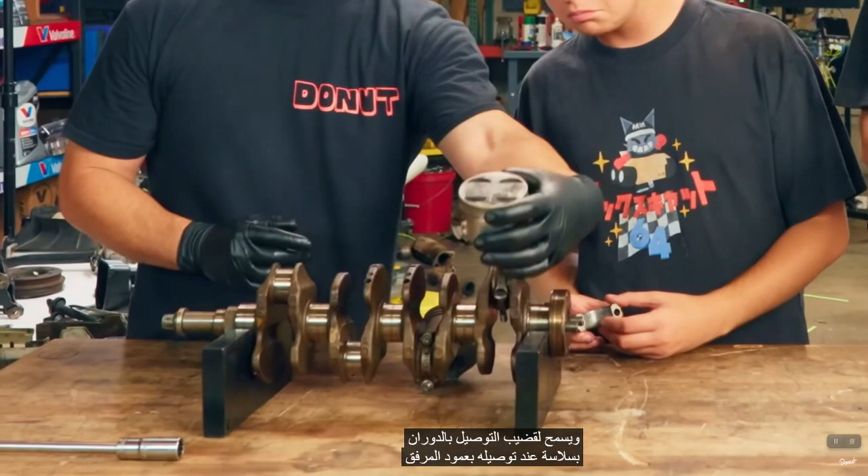The piston is attached to the connecting rod via a wrist pin. On the bottom of the connecting rod is a crankshaft bearing, which minimizes wear and allows the connecting rod to rotate smoothly when attached to the crankshaft. A rod cap holds the other end of the connecting rod onto the crankshaft, completing the connection.

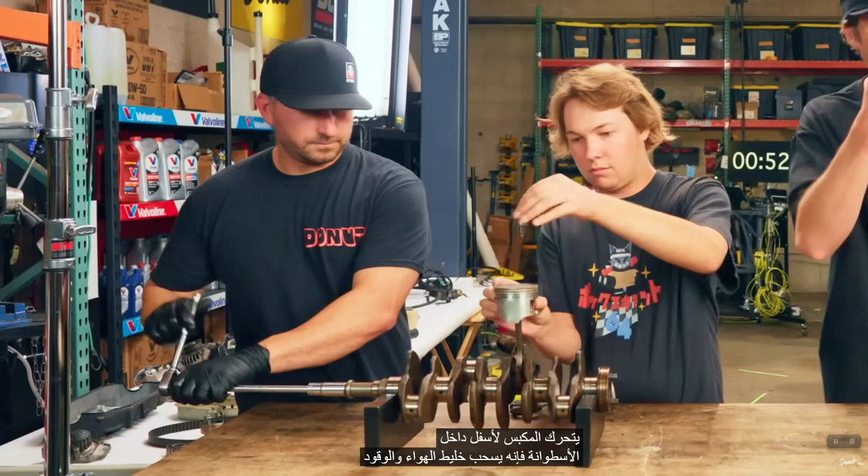As the piston moves down the inside of a cylinder, it draws in an air-fuel mixture. The piston compresses that mixture, which is then ignited by a spark plug. The resulting combustion pushes the piston back down, and then as it returns to the top, it pushes out exhaust gases, and the cycle continues: sucking in air and fuel, compressing it, igniting it, and then pushing out the exhaust.

That process is what gets the crankshaft spinning, which spins the transmission, which spins the drive shaft, which spins your wheels. Okay, so that's the basics out of the way.

But to cover each and every part that goes into this engine, we're going to have to break it down into 6 systems. The rotating assembly, that's the central mechanical system at work. Timing: a lot is going on inside an engine, and those moving pieces need to work in unison. Cooling: engines want to get hot, so you need a system to keep them from overheating. Airflow: if you want to burn fuel, you need oxygen in the equation. Electrical: whether it's a modern car or a 50-year-old beater, a functioning engine needs a functioning electrical system. And finally, and maybe most obviously, fueling.

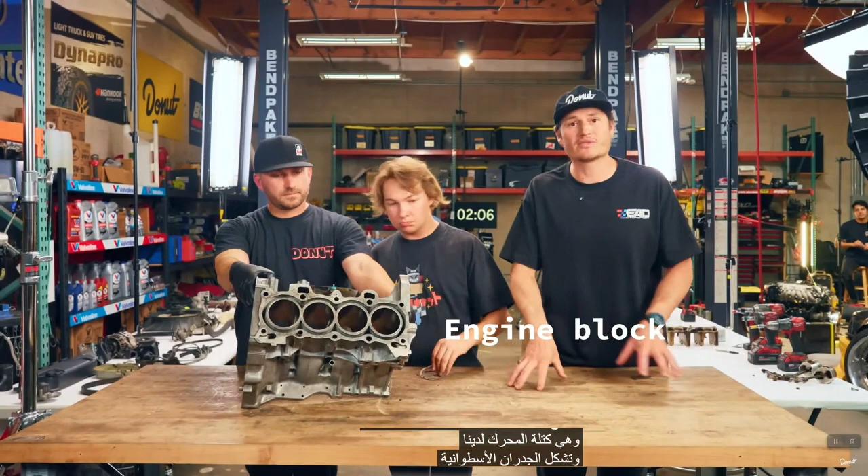In order for compression and combustion to take place, we need a strong, sealed combustion chamber. That is our engine block, and it forms the cylindrical walls of the chamber, while piston rings mounted on the outside of the piston ensure a tight seal.

In our case, the top 2 rings are called compression rings, and they form a seal between the piston and the cylinder wall, while the 3rd ring, called an oil control ring, distributes a thin layer of oil on the cylinder so the piston can move smoothly up and down.

Inside the block are various coolant and oil passages called galleries to help keep the engine cool and lubricated. Looking at the engine block upside down, you can see the semicircular cutouts that will house the crankshaft, which are fitted with crankshaft bearings and 2 thrust bearings that prevent the crankshaft from sliding back and forth.

Okay, good job, boys. That's pretty cool. All right, now let's pick up the pace a little bit.

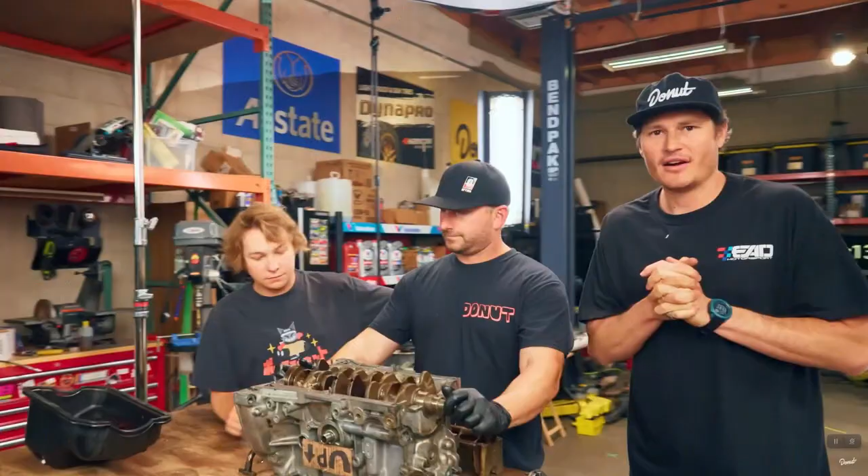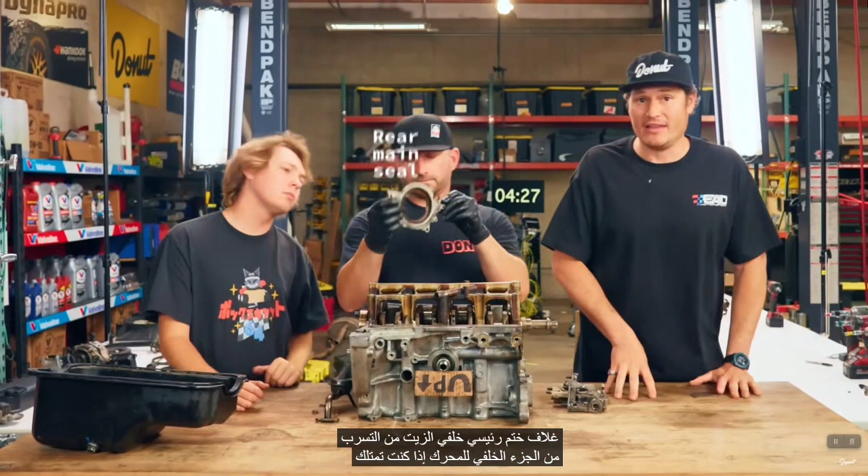Holding the crankshaft is a crankshaft support bracket, which uses little press-in dowels to stay perfectly aligned. A rear main seal inside the rear main seal housing keeps oil from leaking out of the back of the engine. If you own a car from the 90s, this is leaking right now in your driveway. Go check it out, I'll wait.

See, I told you. Now, the front main seal is actually situated in the oil pump, and the oil pump is directly powered by the crankshaft. As it spins, the oil is forced through the galleries, constantly lubricating all of the engine's components. It is also sent through the oil filter, which catches any contaminants in the oil before getting to those important components. Now, feeding the oil pump is the oil pickup tube, which draws oil from the oil pan, which is kept sealed with the oil pan gasket.

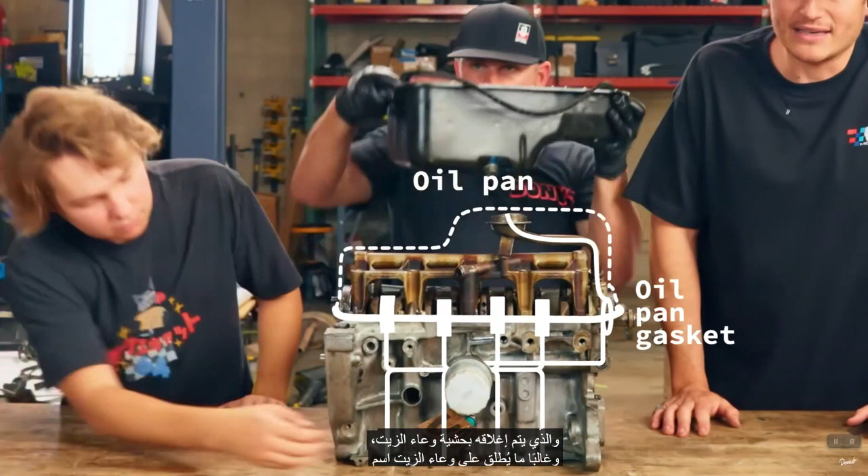Now, the oil pan is oftentimes called the oil sump, and it's where you'll find the oil drain plug, which lets you drain oil before you do a change. This thing right here, drive-through oil shops hate these things.

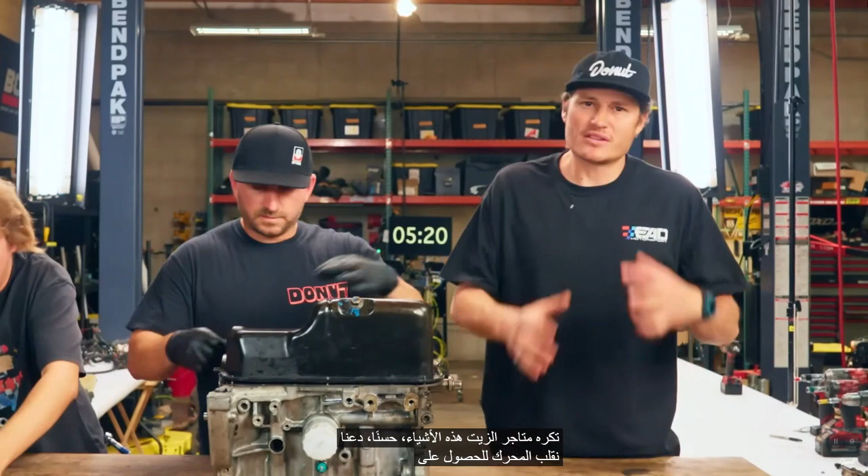Okay, let's flip the engine over to get ourselves a proper perspective, because the engine is translating the up and down motion of the pistons into a rotational motion. That rotational motion of the engine, it can get a little jerky.

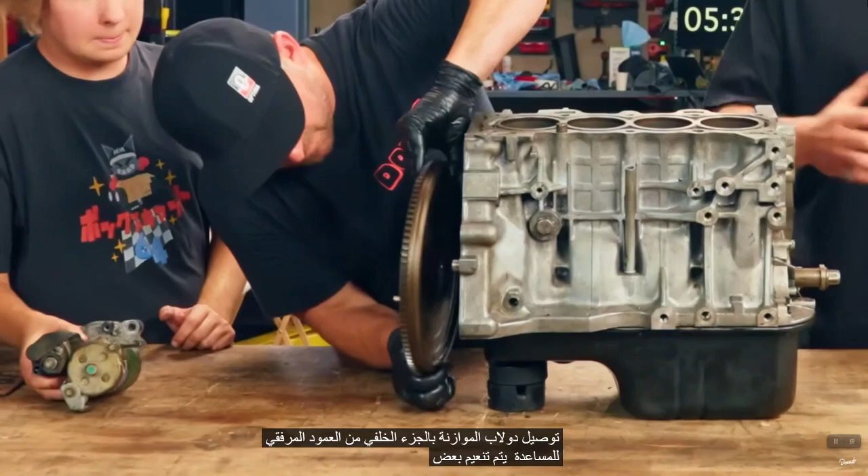So a flywheel is attached to the back of the crankshaft to help smooth out some of the engine's rotational motion. The flywheel is cast with teeth along the outside of it, and those hook up with the starter motor, that's just a small electric motor that gets the engine spinning before combustion can take over.

All right, so that covers most of the rotating assembly, but a lot of the action in the engine occurs at the top of the combustion chamber in the engine's head. Now, this mounts on top of the engine block with the head gasket ensuring you got a tight seal.

Not only does the head seal off the top of the combustion chamber, it also houses all of the intricate pieces that control airflow. Yeah, a lot of pieces. That includes things like the intake and exhaust valves, which let fresh air into the combustion chamber and lets waste gases out.

The valves are held closed by valve springs, which are held in place with valve spring retainers. The valves are pushed open using the camshaft. In our engine, we just have a single camshaft controlling both intake and exhaust, but other engines could have up to 4 camshafts. The camshaft is made up of offset lobes. So as the camshaft spins, which is inside the camshaft bearings, those lobes push on rocker arms, which pivot on a rocker arm shaft and push on the valve.

The valve runs through a valve stem seal to keep oil lubricating this whole assembly and keep it out of the combustion chamber. So as we spin the camshaft, you can see how the lobes push against the valve assembly and the valves open and close. Now, when assembled, the entire valve assembly looks like this.

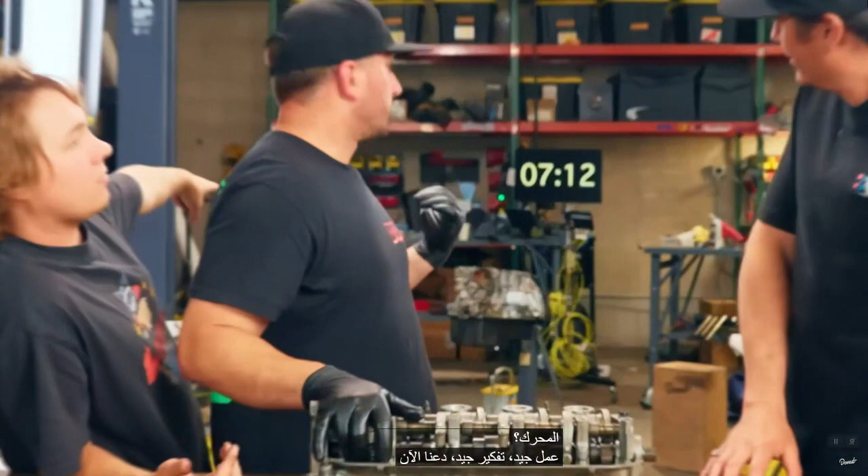Okay, cool. Now let's put the head on the engine. But where did the engine go? Oh, good job, good thinking. Now let's get that head on.

Okay, so we want to make sure that air is going into the engine at the right time and exhaust is leaving the engine at the right time. You wouldn't want a valve opening in the middle of a combustion stroke. So in order to synchronize the timing of the valves to match the timing of the pistons, we can just synchronize the rotation of the camshaft with the rotation of the crankshaft.

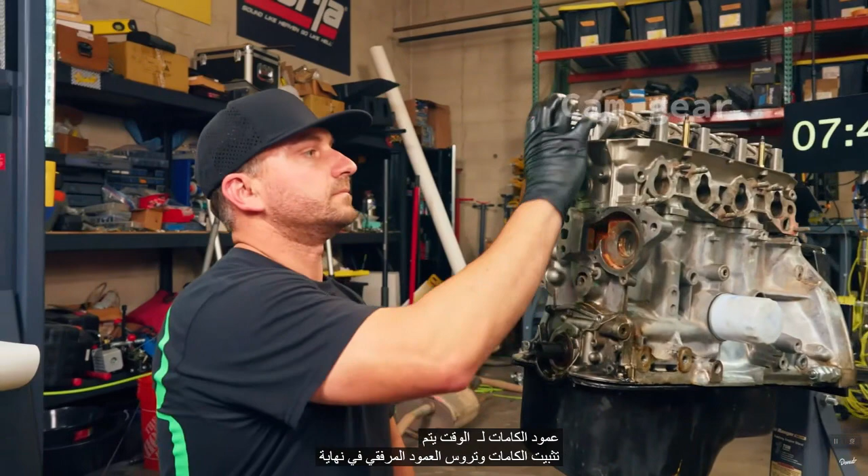So to do that, we need a few gears and a timing belt. A cam gear is mounted to the end of the camshaft to time the cams, and a crankshaft gear is mounted to the end of the crankshaft to drive the camshaft. But the timing belt doesn't just turn the cam gear, it also powers the water pump, which is responsible for sending coolant throughout the engine block to prevent it from overheating.

We're going to come back to cooling in just a minute, but first we need to keep tension in the timing belt using a timing belt tensioner. And the way we link our cam gear, our crankshaft gear, and our water pump gear together so that everything is in time is by using a timing belt.

Now to prevent any dust or other debris getting into those gears, we need a timing belt cover. And then on top, our precious valve assembly is protected by a valve cover.

Now that the valves controlling our air intake and exhaust are in time and the motion of the pistons is in time, we need to ensure that the combustions happen in time as well. So like we mentioned earlier, each combustion is set off by a spark plug.

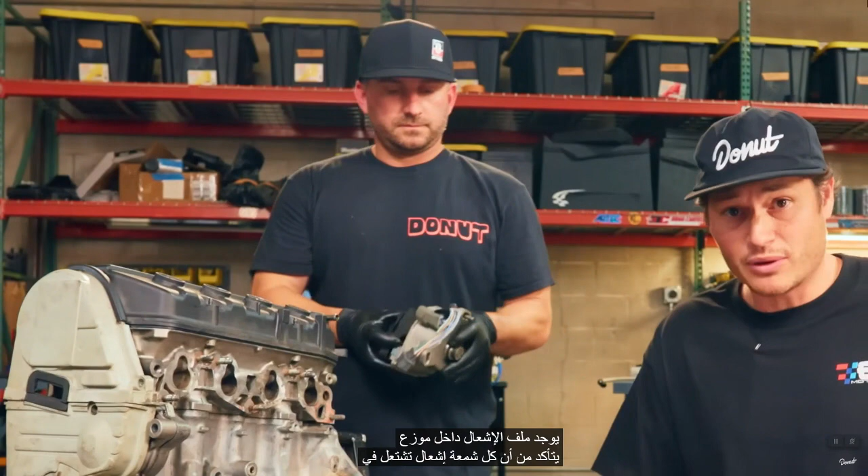Now unfortunately, the 12 volts from a car battery isn't sufficient for a spark plug to create an arc. So an ignition coil uses induction to increase the voltage from 12 volts to something like 40,000 volts. In our case, the ignition coil is found inside a distributor, which makes sure each spark plug fires at the correct time via the rotor.

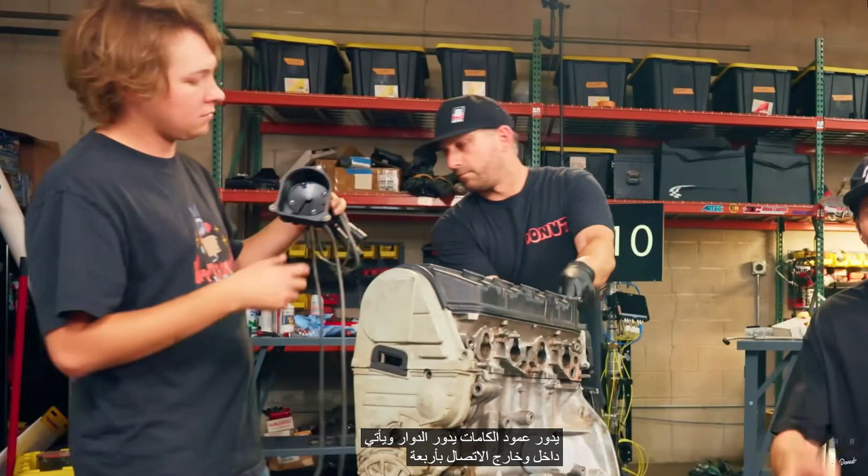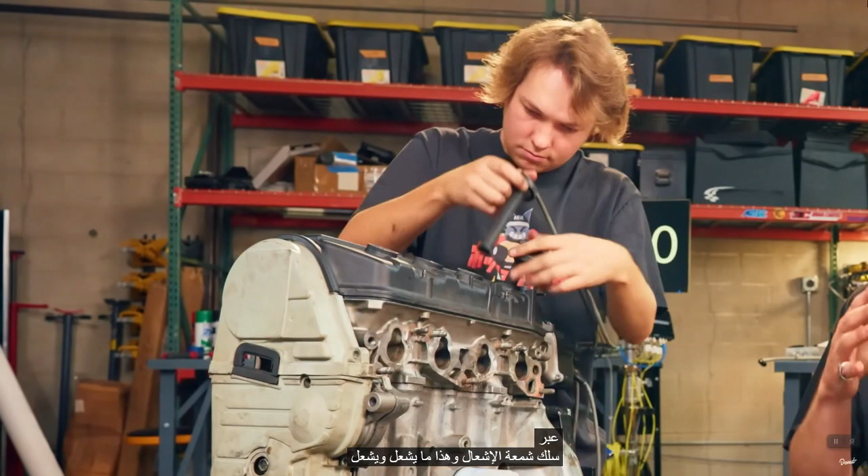The end of the rotor receives electrical current from the ignition coil. So as the camshaft spins, the rotor spins, and it comes in and out of contact with 4 terminals in the distributor cap. As it touches those terminals, an electric current is sent to a corresponding spark plug via a spark plug wire. And that is what sparks and ignites our air-fuel mixture to create combustion.

Now with all those sparks going off thousands of times a minute, we need to keep the battery charged with an alternator. The alternator is held in place by an alternator bracket and an alternator tensioner. Inside the alternator, that is where all the magic is happening.

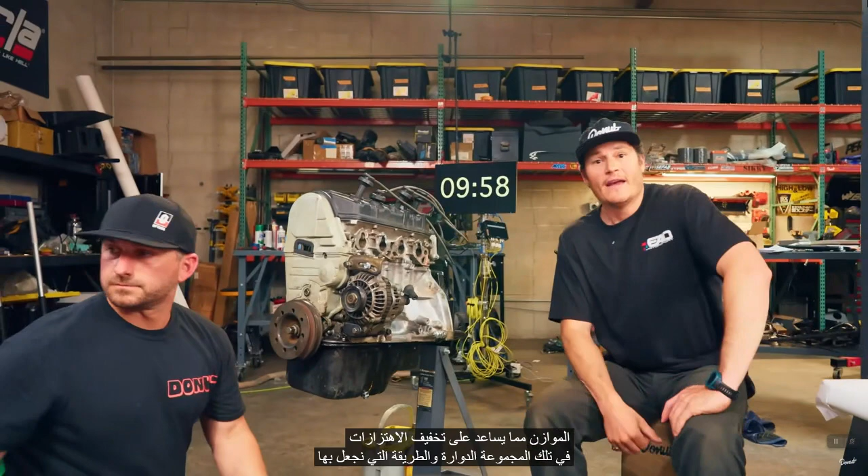An electric current is induced by spinning an electromagnet. That electromagnet is spun by the alternator pulley. Now driving that pulley is a harmonic balancer. Sometimes this would just be a crankshaft pulley, but our pulley is integrated into the balancer, which helps dampen vibrations in that rotating assembly. And the way we get the alternator pulley spinning is by means of an alternator belt.

Now, with all those little explosions going off every second, engines can get hot, like really hot. And since the crankshaft is always spinning, the water pump will always be spinning as well. But sometimes, like in cold weather, you actually want the engine to warm up a bit. So this coolant pipe exiting the pump leads to a thermostat housing, which houses the thermostat.

So the thermostat is technically a valve that slowly opens and closes depending on the coolant's temperature. When the coolant's cold, the thermostat closes and the coolant is redirected back to the engine to keep warming up. As the coolant heats up, the thermostat opens, directing the coolant out of coolant hoses, making its way to the front of the car where it enters the radiator.

Attached to the radiator is a cooling fan which helps dissipate the heat into the air before the coolant returns back to the engine.

Now throughout this process, as coolant heats up, it expands. So the radiator cap allows that expansion to happen at a set pressure. If the pressure gets too much, the spring in the cap compresses where coolant will flow over into the coolant reservoir.

Now, for an engine to run properly, the ratio of air to fuel in the combustion chamber is absolutely critical. So we need to control the airflow going into the engine's intake ports right here.

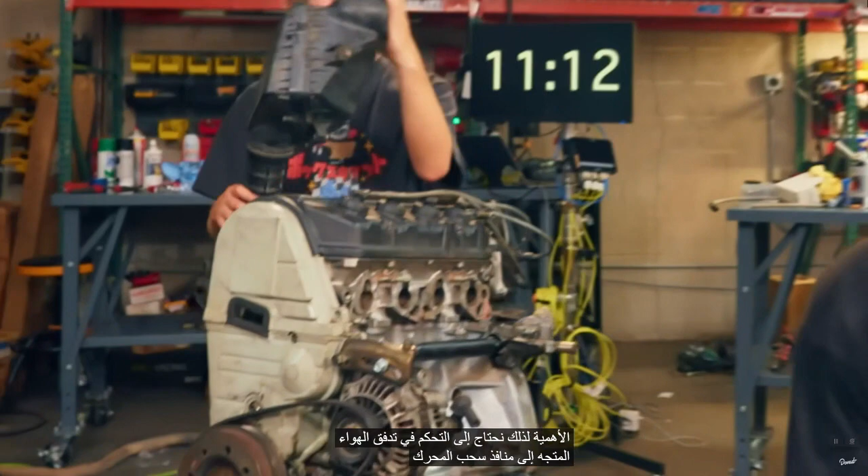Starting from outside the car, air goes through the air filter, which is in the air filter housing. This gets rid of any major contaminants before going through the air intake pipe and past the throttle body.

The throttle body houses a butterfly valve that is controlled by the gas pedal, and it determines how much air gets into the engine. The more air, the more fuel, the faster you can go.

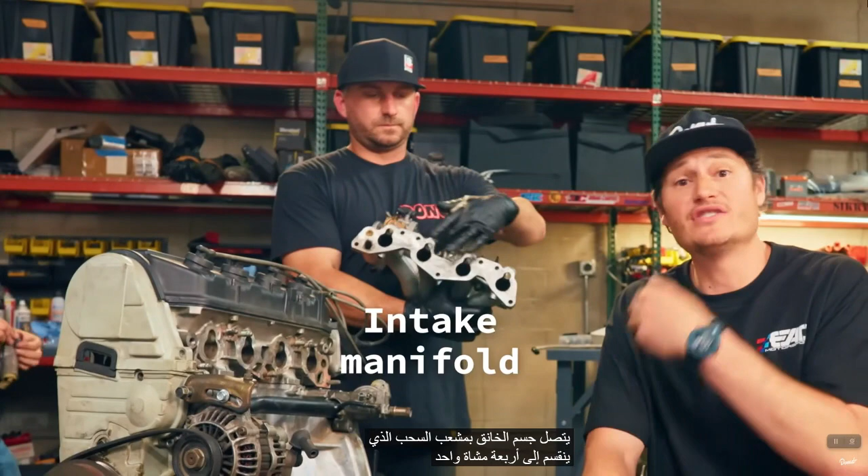The throttle body connects to the intake manifold, which splits apart into 4 runners, 1 for each cylinder in the engine. Next to the throttle body is the idle air control valve.

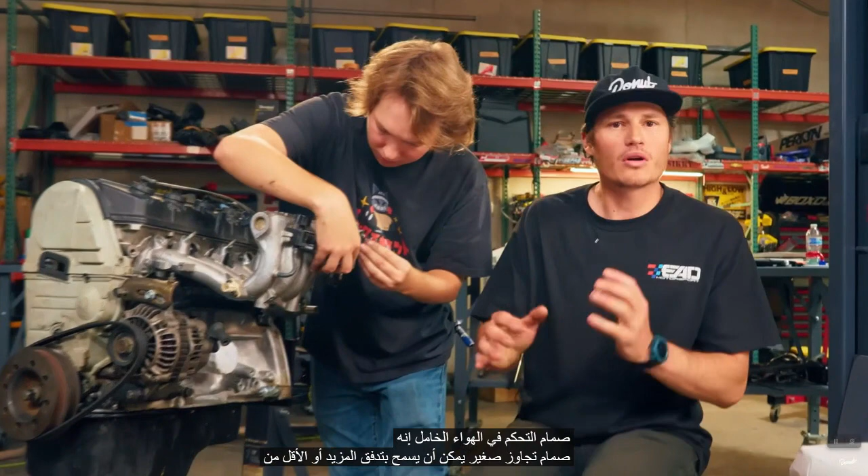It's a little bypass valve that can allow more or less air to flow into the intake manifold to compensate for different air temperatures and densities, and that helps maintain a smooth idle speed.

Now, after combustion, the exhaust gases from each cylinder converge into an exhaust manifold, and then they go through a front pipe into a catalytic converter, a thief's favorite part of a car, where a chemical reaction converts really bad emissions into only kind of bad emissions.

That exhaust gas flows through your exhaust pipe, reaching the muffler, which quiets everything down, and then finally out the tailpipe. Now, some of the combustion might actually get past the piston rings and into the crankcase below.

In that case, the gases will be routed through the PCV system, which stands for positive crankcase ventilation. This includes an oil separator, which is just a box with baffles to ensure only the blow-by gases escape, a PCV valve, which is just a one-way valve, and a hose that leads back to the intake manifold.

That way, any potential harmful fumes will have a chance to get burned up during combustion.

Okay, so where are we at? We covered rotating assembly, timing, cooling, airflow. There are just two main pieces left in this puzzle.

Next up, we need to talk about the brains of the car, the electronic control unit, or ECU. The ECU manages nearly all of the electrical functions in your car. It also processes signals from various sensors to optimize engine performance.

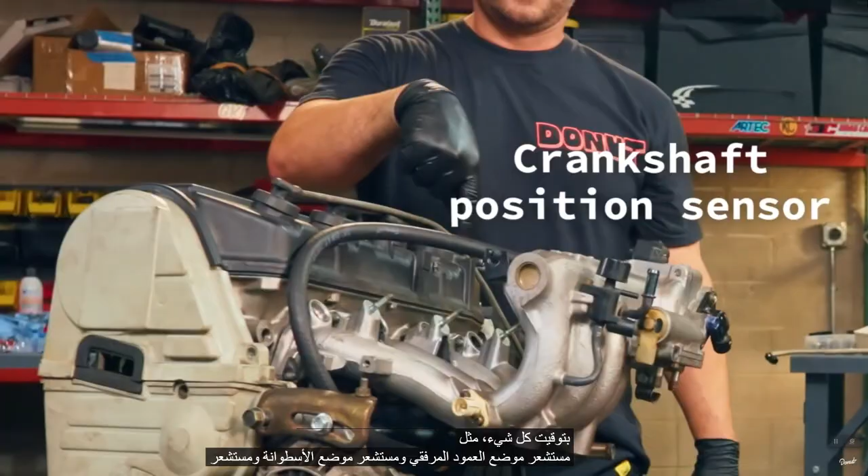Some sensors are just position sensors that tell the ECU the timing of everything, like the crankshaft position sensor, the cylinder position sensor, and the throttle position sensor.

Other sensors let the ECU know information about the elements moving through the engine, like the coolant temperature sensor, the intake air temperature sensor, and the O2 sensor. That lets the ECU know how much unburned oxygen is in the exhaust.

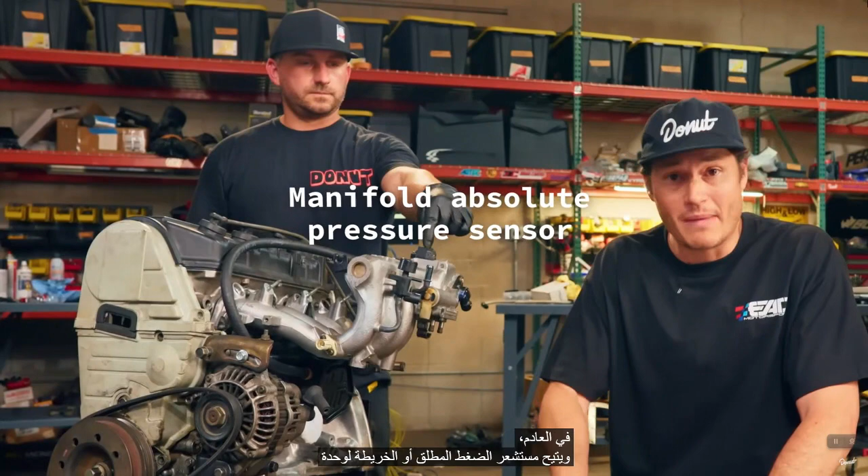The manifold absolute pressure sensor, or MAP, lets the ECU know how much air is getting to the cylinders. And all of those sensors are linked together by the wiring harness.

Okay, we're almost there. We covered the rotating assembly, the timing system, the intake and exhaust, the electrical, the cooling, and the lubrication systems. The only thing missing from our engine is the fueling.

As you can guess, the fuel starts in the fuel tank, gets sucked up by the fuel pump, which includes a fuel filter to keep out some of the larger contaminants. And that pump sends it down fuel lines until it hits the fuel rail.

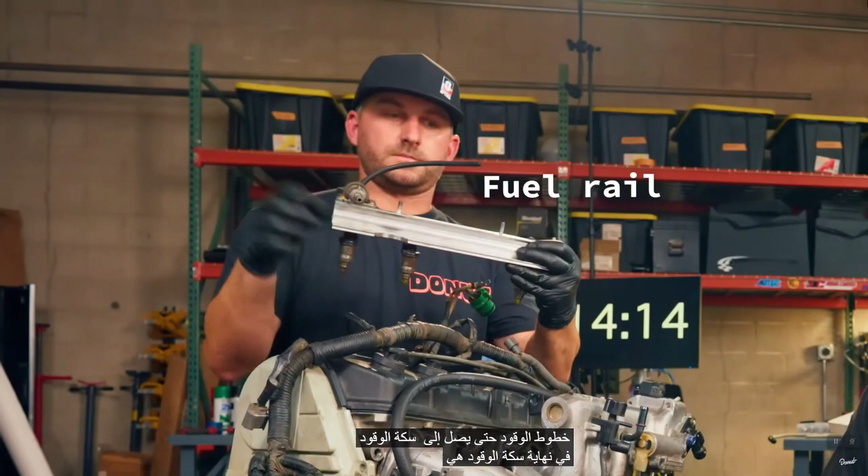At the end of the fuel rail is the fuel pressure regulator to maintain the correct fuel pressure, with any excess being sent back to the tank via the fuel return line. The fuel you want goes through the injector, spraying fuel into the combustion chamber so that your engine can run. And we're missing an injector.